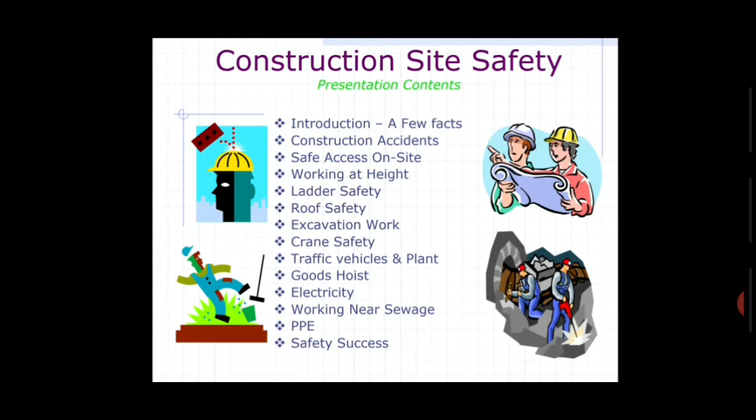Presentation contents: Introduction and a few facts on construction accidents, safe access on site, working at height, ladder safety, roof safety, excavation work, crane safety, traffic vehicles and plant, goods hoist, electricity, working near sewage, PPE, and safety success.

A few facts: the first week on each new site is the most dangerous. Accidents are more frequent at the end of the day. Small building jobs are the most risky.

Safety helmets, high visibility jackets, and safety boots do prevent injury and death. Lightweight shoes such as trainers or runners are not suitable on site.

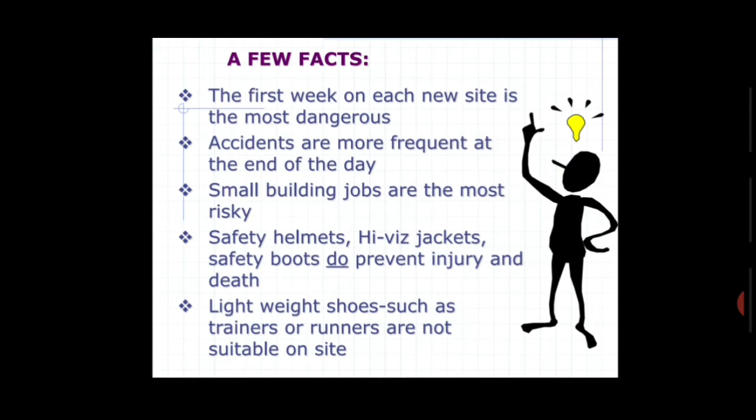Construction accidents: breakdown of fatalities according to type of accident in the construction industry. 56% are falls from height, 21% are trapped by something collapsing or overturning, 10% are struck by a moving vehicle, 5% involve contact with electricity or electrical discharge.

4% are struck by a flying or falling object during machine lifting of materials, 3% involve contact with moving machinery or material being machined, and 1% involve exposure to a hot or harmful substance.

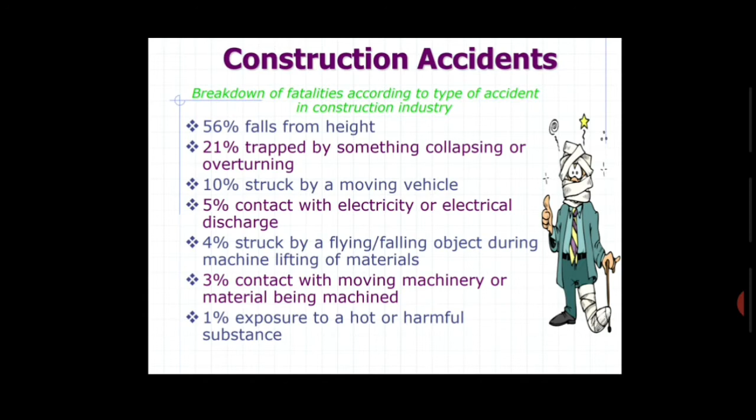Safe access on site: everyone can get to their place of work safely. Edges from which people could fall are provided with double guard rails or other suitable edge protection.

Holes are protected with clearly marked and fixed covers to prevent falls. The site is kept tidy, with good lighting, and fenced off from the public.

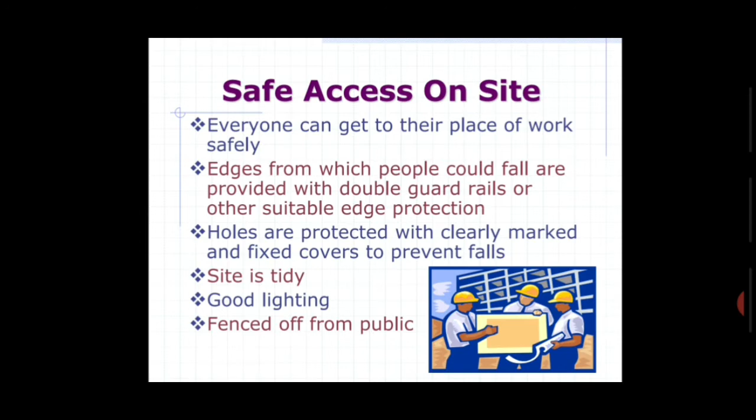Working at height: height hazards on construction sites include holes in floors, gaps on working platforms, and shafts and stairwells not adequately covered, barricaded, or fenced off. Using ladders or scaffolding without proper fixing is crazy.

Never use incomplete scaffolding. Make sure there are handrails and toe boards at all edges.

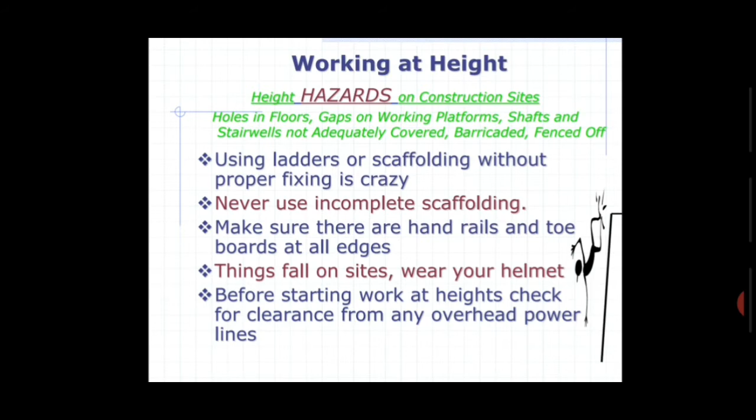Things fall on sites, so wear your helmet. Before starting work at heights, check for clearance from any overhead power lines.

Lethal ladders: ladders kill a lot of people. Make sure the ladder is right for the job.

Would scaffolding or a cherry picker be better? Make sure the ladder is in good shape, secured near the top, on a firm base, and footing at a 4 up, 1 out angle.

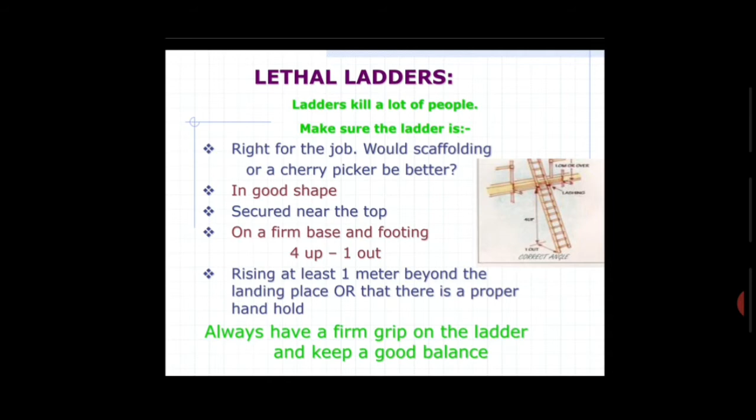The ladder should rise at least 1 meter beyond the landing place, or there should be a proper handhold. Always have a firm grip on the ladder and keep a good balance.

Safe ladders: never allow more than one person on a ladder. Use tool belts or hand lines to carry objects.

Do not lean out from the ladder in any direction. If you have a fear of heights, don't climb a ladder. Do not allow others to work under a ladder in use.

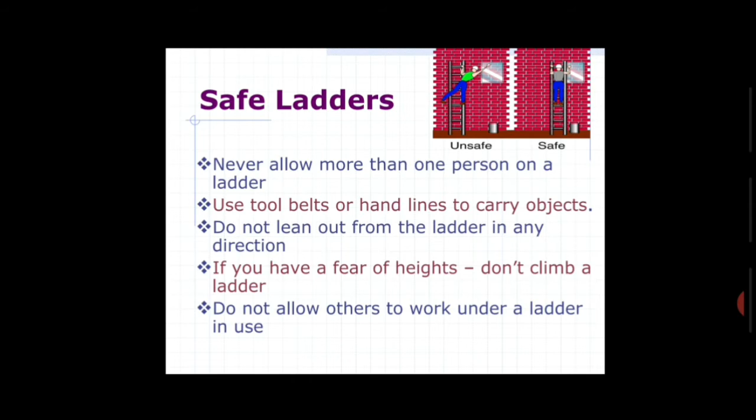The roof, a risky place to be. Very simply, always inspect a roof before you walk on it.

You must have protection to stop you from falling off the edge. You must use proper safety harnesses and running cables when working on top of a roof.

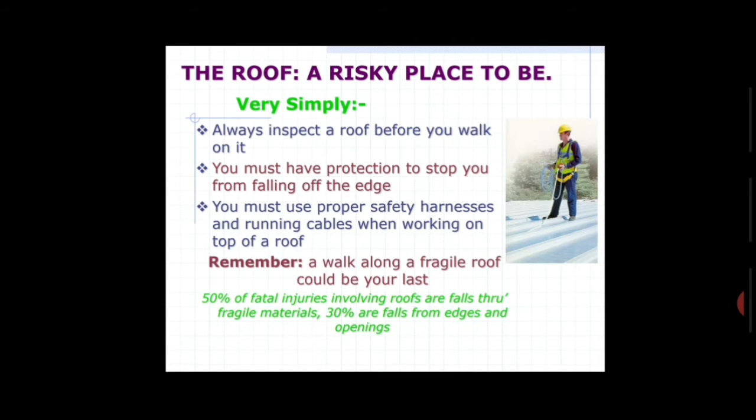Remember, a walk along a fragile roof could be your last. 50% of fatal injuries involving roofs are falls through fragile materials, and 30% are falls from edges and openings.

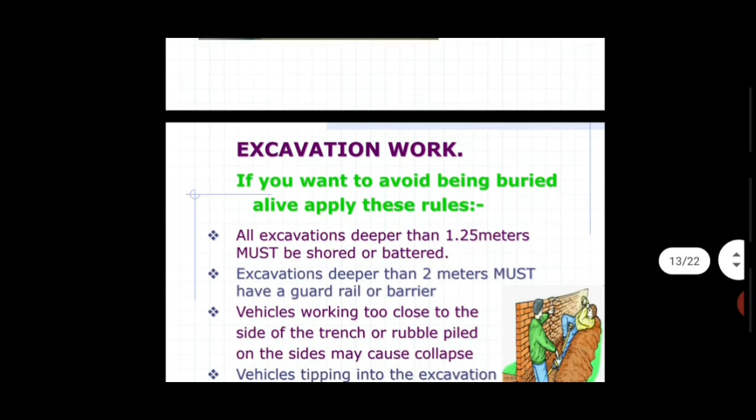Excavation work: if you want to avoid being buried alive, apply these rules. All excavations deeper than 1.25 meters must be shored or battered.

Excavations deeper than 2 meters must have a guardrail or barrier. Vehicles working too close to the side of the trench, or rubble piled on the sides, may cause collapse.

Vehicles tipping into the excavation must use stop blocks.

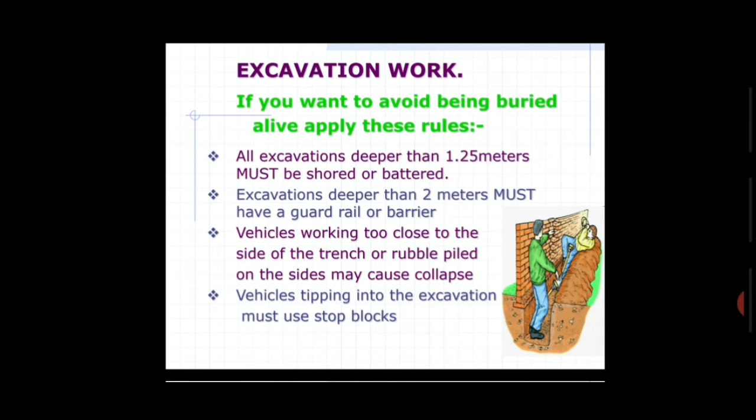Excavation work: if you want to avoid being buried alive, apply these rules. Make sure the excavation is inspected daily.

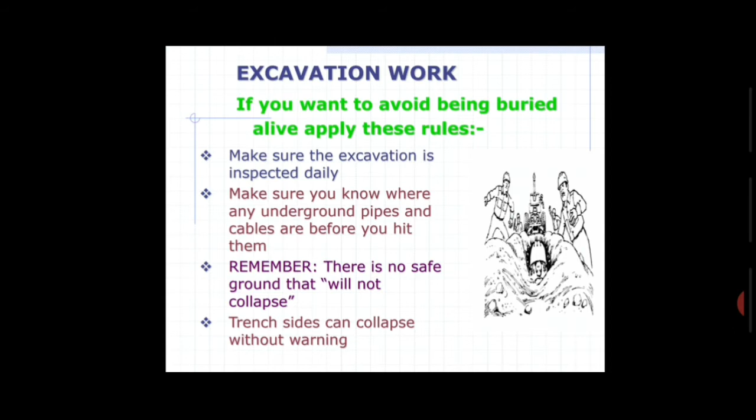Make sure you know where any underground pipes and cables are before you hit them. Remember, there is no safe ground that will not collapse. Trench sides can collapse without warning.

Crane safety: very simply, the weight of the load must be carefully estimated. The crane must be fitted with an automatic safe load indicator that works.

The crane must always work on a hard level base. The load must be properly fixed and secured.

The banksman must be trained to give clear signals. Never be carried with a load.

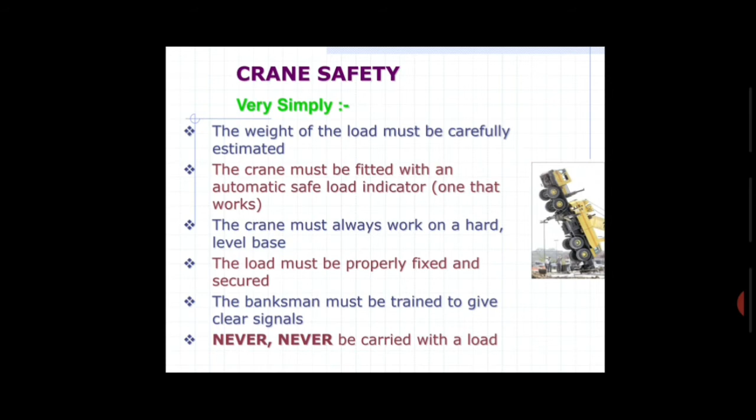Traffic, vehicles and plant: vehicles and pedestrians should be kept apart on site. Separate them as much as possible using barriers.

Allow adequate clearance around slewing vehicles. Avoid reversing where possible and use a one-way system.

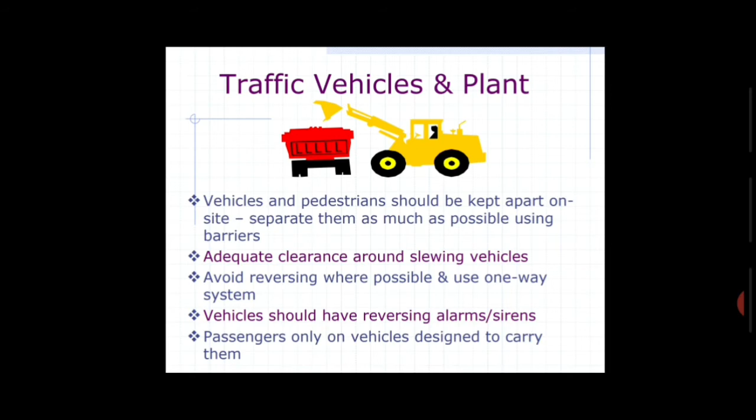Vehicles should have reversing alarms or sirens. Passengers should only ride on vehicles designed to carry them.

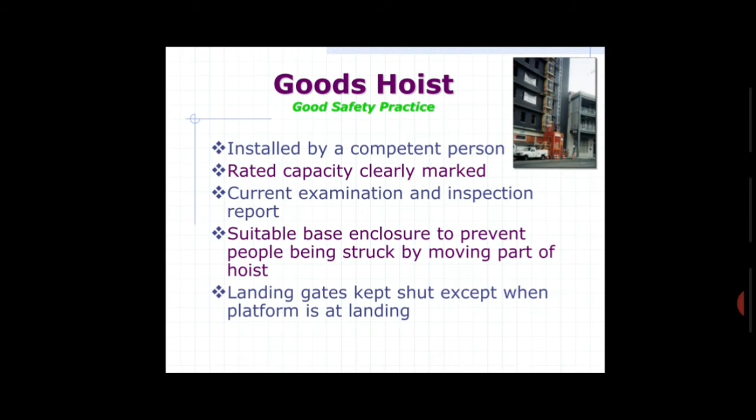Suitable base enclosure to prevent people being struck by a moving part of the hoist. Landing gates kept shut except when the platform is at the landing.

Electricity: good practice with electricity on site. Treat electricity with respect, and check constantly that cables are not damaged or worn.

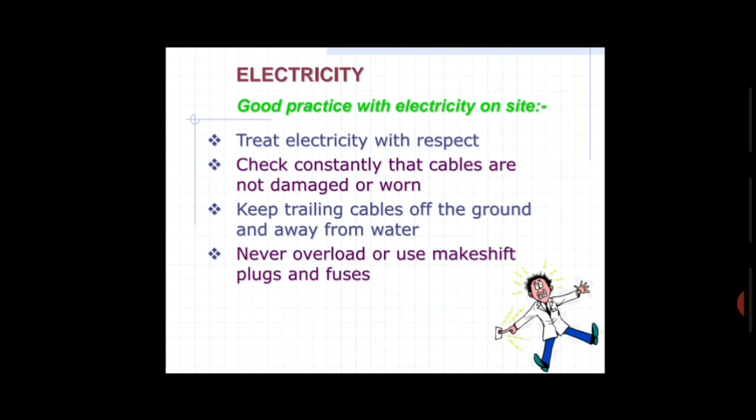Keep trailing cables off the ground and away from water. Never overload or use makeshift plugs and fuses.

Working near sewage, health risks: gastroenteritis, hepatitis, Weil's disease, leptospirosis, rats' urine, asthma, skin and eye infections, and inflammation of the lungs.

How do you become infected? Hand to mouth, through eating, drinking, smoking, or wiping the face with contaminated gloves, is most common. Skin contact through cuts, scratches, or wounds, and some organisms enter the body through the eyes.

Breathing in either dust or mist. How to protect yourself? Understand the risks.

Understand how you may be infected. Wear protective clothing and avoid sewage if possible. Apply good personal hygiene, and cleanse and cover all wounds.

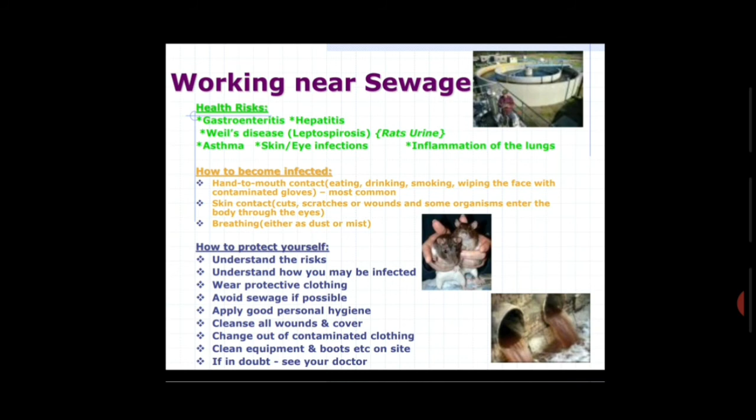Change out of contaminated clothing, clean equipment and boots on site, and if in doubt, see your doctor.

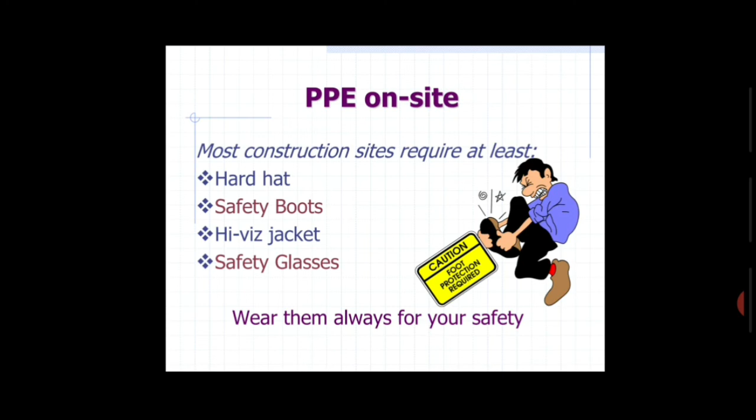PPE on site: most construction sites require at least a hard hat, safety boots, a high visibility jacket, and safety glasses. Wear them always for your safety.

Basic safety philosophy for success. A new safety culture: all accidents are preventable. No job is worth getting hurt for.

Every job will be done safely. Incidents can be managed. Safety is everyone's responsibility, with continuous improvement and safety as a way of life, 24 hours a day.

All individuals have the responsibility and accountability to identify, eliminate, or manage risks associated with their workplace. Legal obligations will be the minimum requirements from our health and safety standards.

Individuals will be trained and equipped with the skills and facilities to ensure an accident-free workplace. What is your approach to safety?